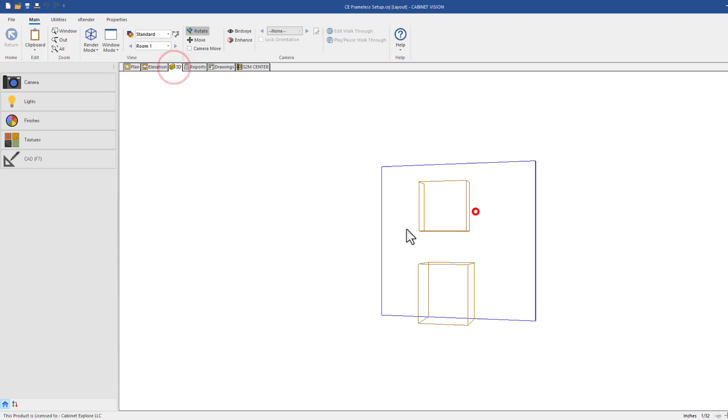So we have a nice starting point on our cabinet construction. There's obviously a lot more questions and things I didn't show. In the construction section later in the course, I'll go deeper into a few topics, but for now this gives us a good basic understanding of where things come from, how parts know how big to be, and how they connect to other pieces.

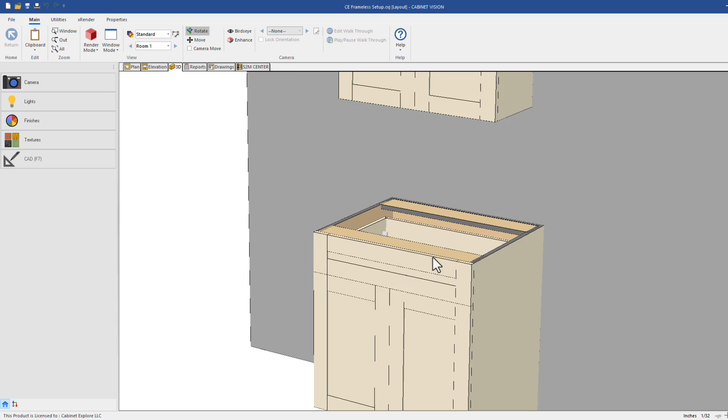Now, for the next two videos, we're going to get into drawer boxes and drawer guides, because we haven't discussed that. Early on, we made a drawer box material schedule, but we haven't made a drawer box construction. You can see we actually have some weird things going on there, like the drawer guide showing through the top. So I'm going to close out of here.

And we're going to go to assembly, and switch the toggle from assembly to drawer boxes. The first thing I'm going to do is delete everything except Blum Tandem and Blum Tandem Interior.

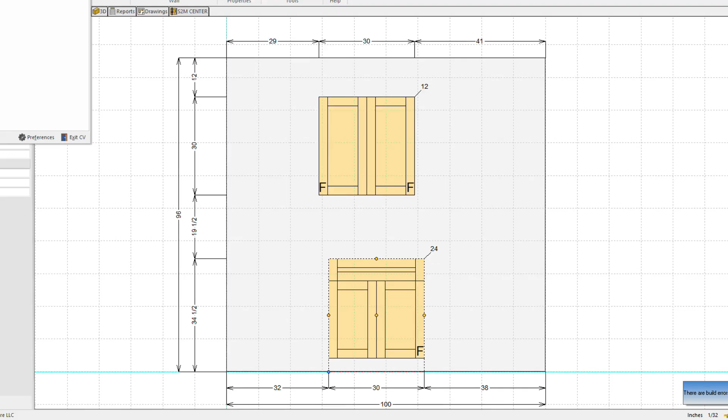Okay, so back at the main screen, I'm going to go to assembly. If it's on assembly, you have to switch it to drawer box in order to see your drawer box construction methods. You might see several different constructions in your library. What I would do is delete everything except the Blum Tandem and the Blum Tandem Interior.

If you want to wait and delete, that's totally fine. But basically what I want to do here is make just a very simple butt joint drawer box construction that works with Blum slides, and then I'll copy it and make that my rollout slide, because there's no reason to answer all the questions for the drawer box and the rollout.

So what makes the difference between the drawer box is we have the style that says 5-piece drawer box, and on these it says rollout.

Okay, so I'm going to get started answering a few general questions, and then we'll go into a job and look how it looks. So in general, I'm just going to skip the cost and labor questions.

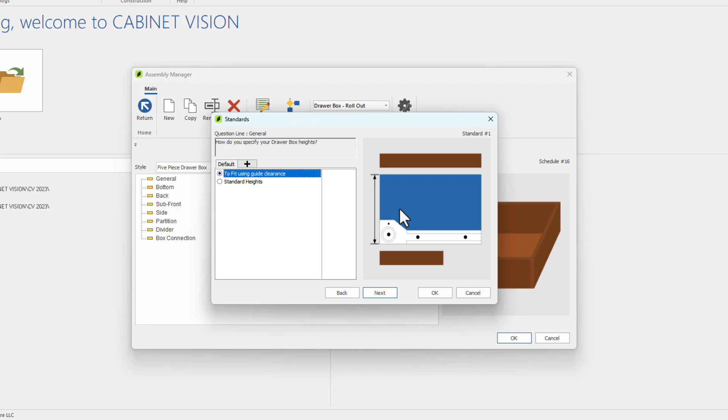That's for Bid Center. The very first thing we want to get into is the heights. Now, I'd say 90 to 95% of people will use standard heights. If you do fit using guide clearance, you just say you want a 1/2 inch clearance on top and 1/2 inch on the bottom, and the drawer box might end up being 4 and 7/32 tall. I like to do standard heights.

Then I just tell it from largest to smallest how high a drawer box can be, and I like to do 1-inch increments. So let's say 12 is the biggest box I want to build. I've got 12, 11, 10, 9, 8, 7, 6, 5, all the way down to, I think, 2-inch. I really like this because it keeps your drawer report very clean. You don't have weird increments on your height.

Now, if you're machining plywood drawer boxes, you might be less concerned about that. But if you're outsourcing your drawer boxes, more than likely you're going to be using this. So you just pick your largest box all the way down to your smallest, and you can go in whatever increments. Maybe you just want 2-inch or 3-inch increments rather than every 1 inch, and that's up to you.

Then we'll do depth clearance. This is what tells Cabinet Vision when to switch from a 21-inch drawer to an 18-inch or whatever increment we have. I've found that normally 7/8 or 1 inch is kind of the sweet spot, but you can play with that if you don't like where it's switching.

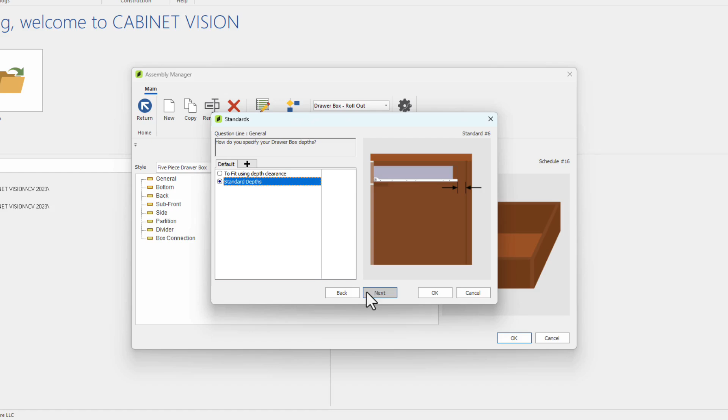Standard depths, similar to standard heights, this is what tells us how deep a drawer should be. I'm going to delete what's in here. Blum's stock boxes use kind of these weird measurements. I like to just go every 3 inches.

The other strategy I like to use is I don't want it to automatically, if I make a 30-inch deep base cabinet, put a 27-inch deep drawer box in there, because the drawer guides aren't really stock items, and I'd rather manually be in control of that.

So what I like to do is for my main construction method, I start at 21. That way, no matter how deep the cabinet is, it's going to be a 21-inch deep drawer box unless I switch to my secondary construction method that allows it to go all the way up to 30.

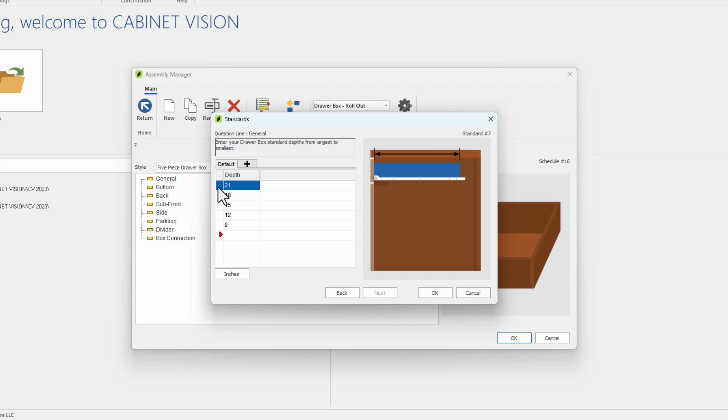This will make a little more sense as we get into the next video where we set up the drawer guides, because the drawer guides need to be set up the exact same as what we enter here. For example, I don't want my guides to be allowed to go all the way to 30, but my boxes stop at 21, or vice versa. So whatever we put here, when we get into the drawer guide material schedule in the next video, we need to match it exactly to this.

Okay, and then I'm just going to answer a couple questions here. I want to put a 1/2 inch gap below.

And some of these, I don't think we're going to need a whole lot of these. Pretty much the only thing we need to do is down here in box connections. So I'm going to put 1/2 inch and a 1/4 inch, and I'm going to do a through dado so it goes all the way to outside. So this is the drawer box bottom going into the side.

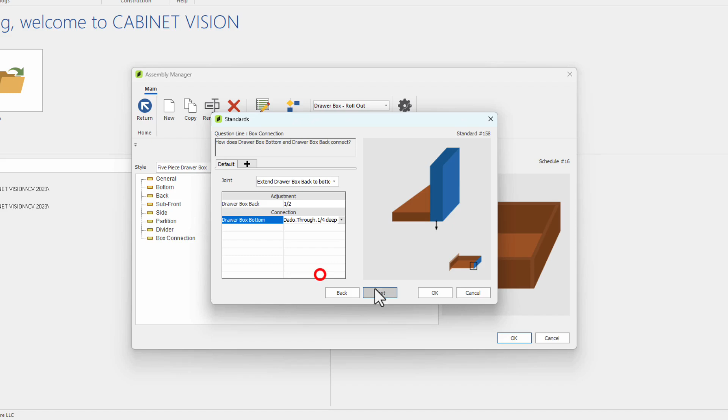I'm going to put a through dado into the side, and then the actual drawer box side will go below the bottom a 1/2 inch. I'm gonna do the same thing here, 1/2 inch with a through dado, and 1/2 inch with a through dado.

Okay, now it's gonna ask me how I want it to connect. So how does the drawer box back and side connect? We can make the side go all the way to the back, or we can make the back come all the way out. I think I'm gonna make the side go all the way to the back with no connection.

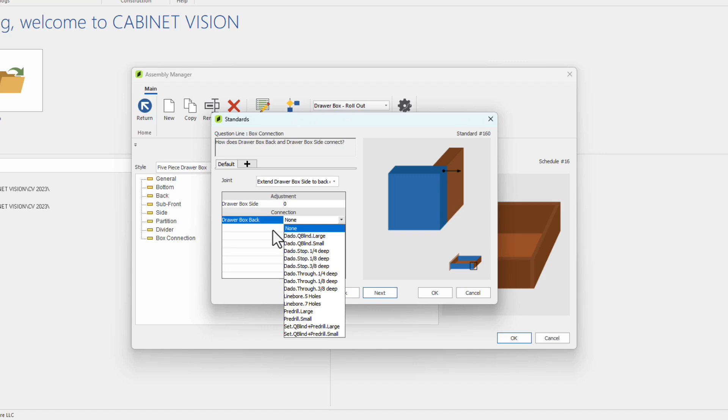So here's where you could do a qualified blind dado, you could do a Cabineo, you could do pre-drills, you could do a dovetail. All these are done through the connection manager exactly like the cabinet construction is. So like I said, I'm gonna do just a butt joint for now, but this is where back to sides, this is where we would pick a connection.

It's gonna extend, the side is gonna go all the way to the box front, that's good. And I'm not gonna worry about the partitions, that's all good. So let's go look at this and see if we like it.

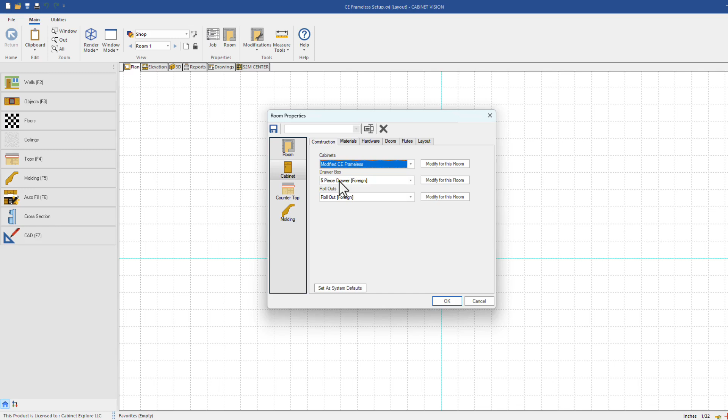So I'm gonna go into my room settings, and because I deleted some of my construction methods, you can see with this foreign, which we don't want to leave it on foreign. So I'll just save that. And let's put it on 5/8 maple, that'll be fine.

Okay, and it's a little bit hard to see because all these case parts are in the way. If we go to section, modifications, hide parts, I just want to hide everything except the doors and drawers. And this just makes it a little easier to see in the 3D view.

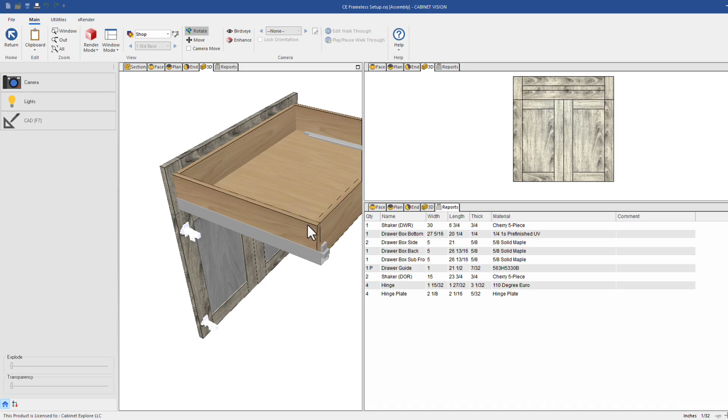You can see we just have a butt joint going all the way through, and I like to hold the, I'm gonna make my back stop above the bottom, and I want the bottom to run all the way out to the back. That way I don't have to do that little notch thing.

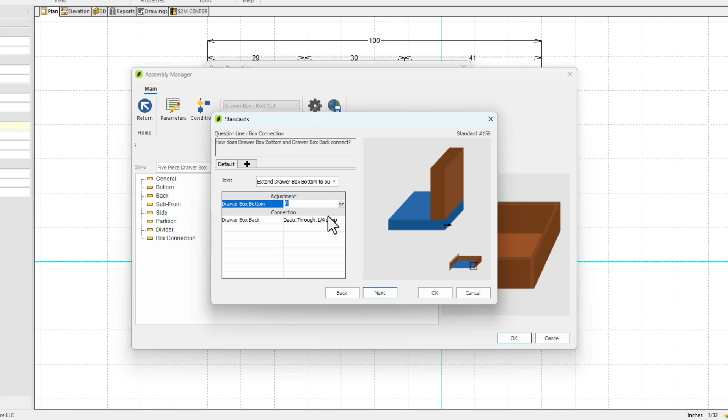So I'm gonna modify the construction, and I wanna find the drawer box bottom to back connection. And the bottom will extend all the way out, and then I'm gonna get rid of the connection because we don't wanna put any dados here.

Okay, so let's see how that did. There we go. So now my bottom's coming all the way out. Now you can see it's still trying to notch. We'll be able to disable that.

In fact, my drawer guide in general is in the wrong place. In the next video, when we go to our guide schedule, we will set that up. Okay, so that's looking good.

Now, let's save this as our system construction. And make sure, like I said, anytime you hit save a system, be very careful, make sure you replace the right thing.

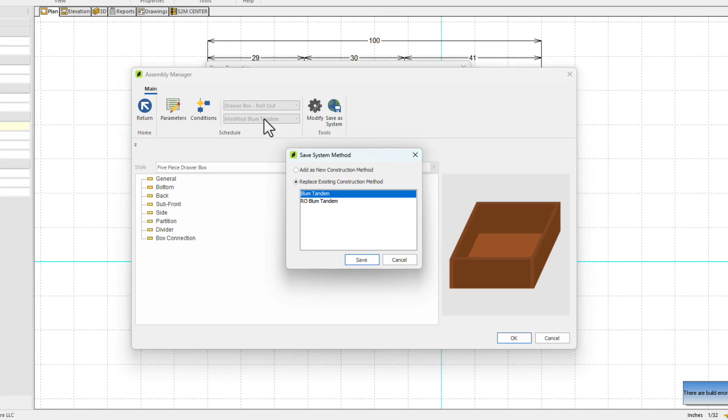Okay, now we're gonna close out. And now here is where I want to copy this. And I'll just call it rollout Blum Tandem. And then I'm gonna delete the old one.

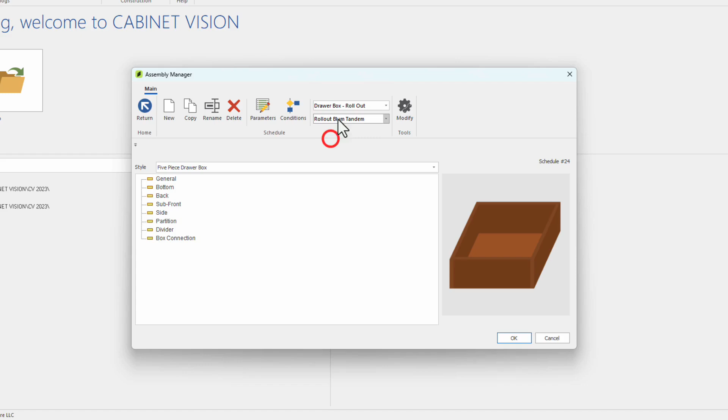And like I said, I like to do this once I'm totally satisfied with my regular drawer box, then I'll copy this and change this to a rollout. And that way all of the connections are the same.

Really the only new question is the rollout default type, which you'll be able to change this at the cabinet level, but that's the one question that when you switch the style, you will need to come in and tell it how tall to be.

Okay, so that's the construction method, and like I said, there's a lot of different ways of doing drawer boxes, but that's just like the cabinet, just focus on one thing at a time, do it inside of a job so you can see what's working and what you need to fix.

Okay, so now in the next video, I want to get into the drawer guide schedules, and that's very important that it lines up with the drawer box construction, like I mentioned. So let's get into that.